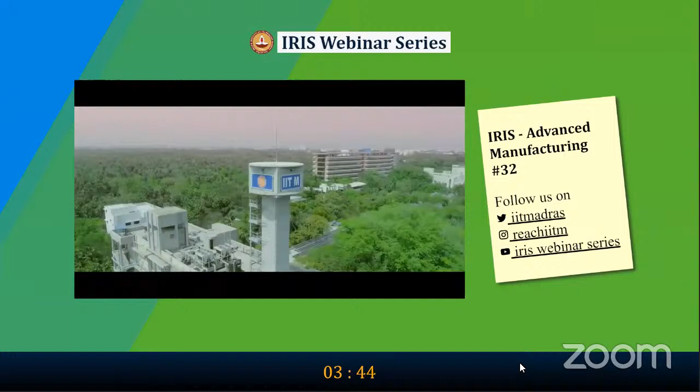As part of our commitment to the cause of fostering world-class research, IIT Madras has set up a number of research initiatives in diverse fields of contemporary relevance. Many of these initiatives will go on to become centers of excellence within the IIT Madras system. A total of 68 research initiatives belonging to 21 identified technology clusters are presently underway.

As part of these initiatives, it is proposed to host a series of webinars from each cluster to showcase the innovative research being generated to various stakeholders like researchers, industrialists, and policymakers. These webinars will give an opportunity to engage in conversation with eminent faculty from IIT Madras and other international researchers, and also to find more collaboration in those research areas.

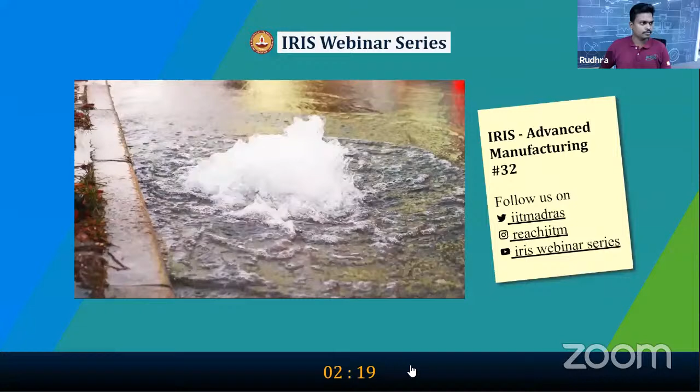From our survey, we found that most of it goes into leakage, and since the pipelines are underground, there is no way of telling where the leakages are.

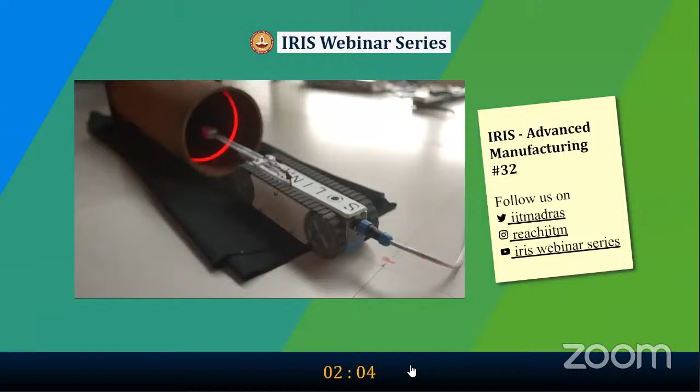Endobot is a robotic device which can travel inside underground pipelines to identify various types of defects.

Other than water pipelines, Solinas has also developed similar devices that can be used in oil and gas pipelines. It is the recent access to open source electronics that has made such robotic automations possible at an affordable price.

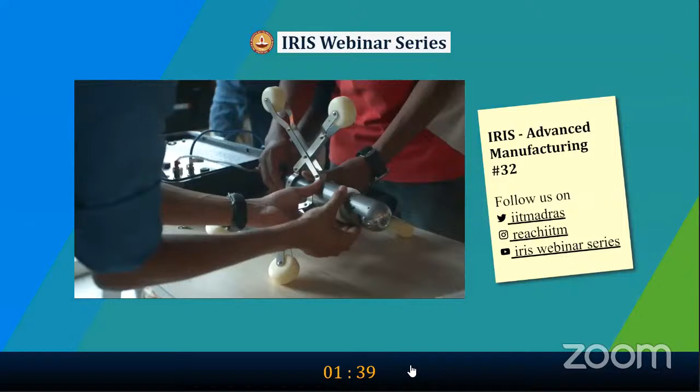A 12-feet minaret on the Darwaze-e-Roza of the Taj Mahal was blown away by high-speed winds in Agra on Wednesday.

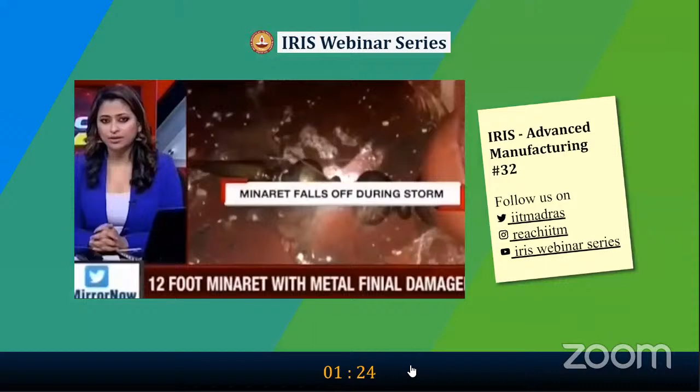Unscientific interventions are responsible for decay in a shorter period of time than their thousands of years of existence would otherwise suggest.

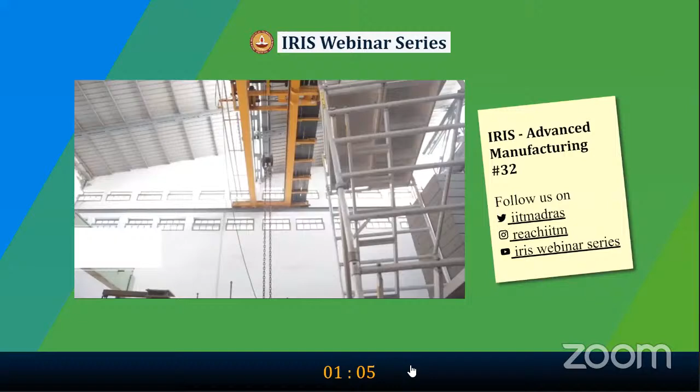Although study of materials used in heritage monuments and other structures is not new, there was little R&D in the area of structural and engineering aspects of these heritage structures until the National Center for Safety of Heritage Structures was set up inside IIT Madras in 2013.

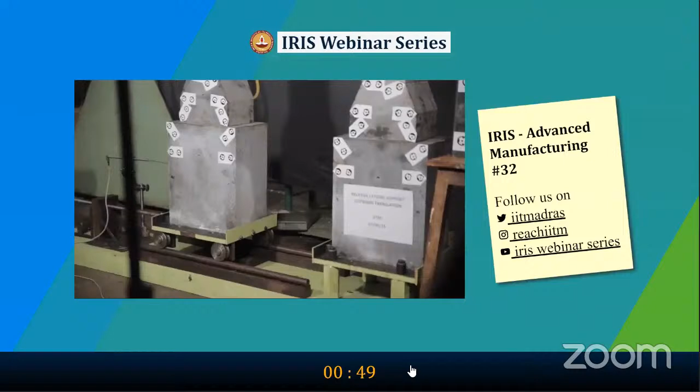We're working with a large number of historical monuments in our country, across the length and breadth of the country, and not only in India, even abroad.

Actually, we have a very good world-class gym facility.

Thanks for the lovely video, Shivram. I mean, IIT Madras, it's a big ocean. It's always good to know a lot more about IIT Madras.

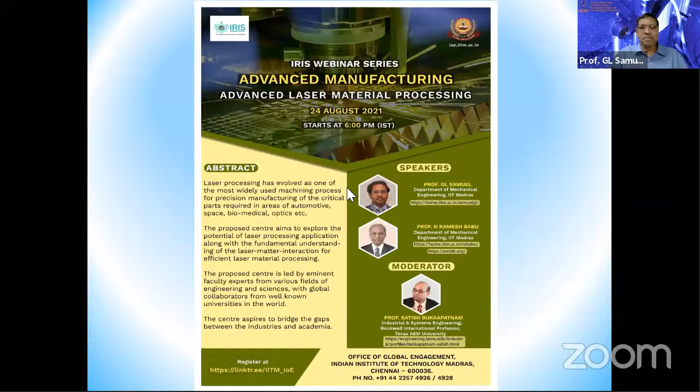Under the main heading of Advanced Manufacturing, the name of our center is Center of Excellence for Advanced Laser Material Processing. We need to thank our government and the Ministry of Human Resource Development, MHRD, for giving IIT the status of Institute of Eminence. We thank our director, deans, and all the team for helping in building up these centers of excellence. This center is a part of advanced manufacturing technology.

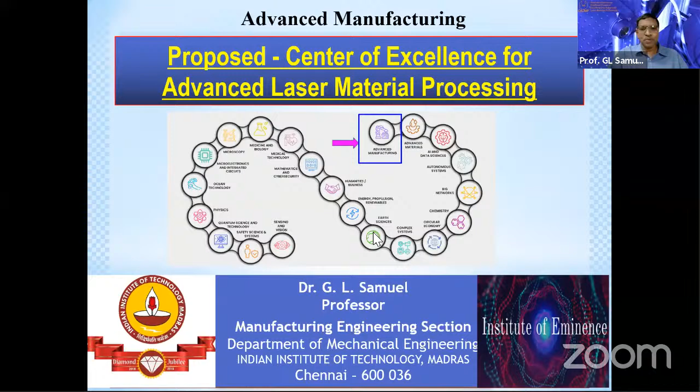Today we'll be looking at some fundamentals about lasers, and then we'll look at some of the applications of lasers and the work which we propose to do in this center. We'll also introduce you to the team who are working on this, and we have an exciting small quiz for all of you - we'd like to understand your level of knowledge about lasers. You may think we'll do the quiz after the seminar, but no, we are going to do it right at the beginning to see how you will do.

If you talk about lasers, light amplification by stimulated emission of radiation is a very interesting phenomenon. Right from my childhood, I've been fascinated by lasers, so now I got an opportunity to work on this, and I thank God for that. If you look at the background and history, this phenomenon of coherence and lasers was found in the beginning, and they made a statement saying it looks like a very interesting phenomenon but without any applications. But today, from where we stand, look at the number of applications being done with these lasers - starting from the laser pointer, which we as teachers use almost every day, to big phenomena like Star Wars, where they wanted to take very powerful lasers and focus them on anything which can be destroyed.

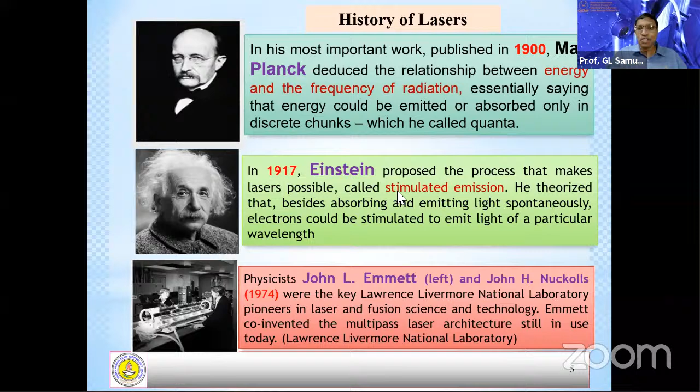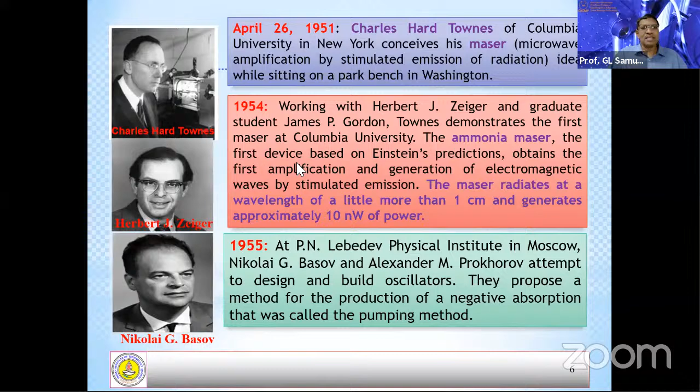Einstein talked about stimulated emission, and the inventions go on. Several people contributed to discovering lasers and bringing them to the level we have today. Charles Townes is another name associated with this, and there were several patents in the US and other countries that were developed. Finally, we arrived at the state we are talking about today.

When you look at some of the laser applications, you'll wonder how so many applications we've been able to develop.

When you look at lasers, we can divide them into different categories based on how they are produced. For me, I've divided them into three categories: continuous lasers, short pulse lasers, and ultra-short pulse lasers.

Pulse lasers are more powerful than continuous lasers. Think of an example: if you want to break a stone, you can either take a big hammer and hit it powerfully, or take a small hammer and hit it several times. In both ways, you can break the stone.

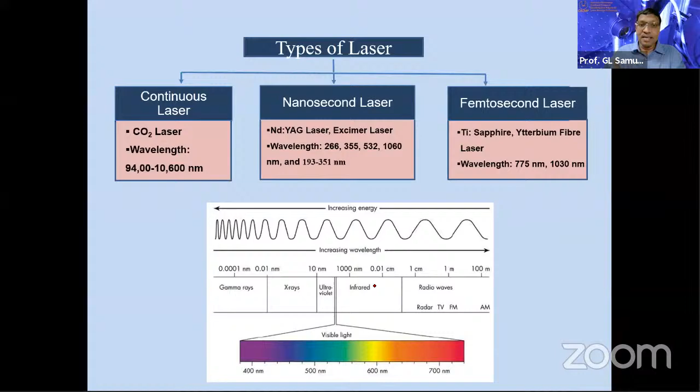Pulse lasers are very, very powerful and are available across all ranges, from ultraviolet, where you can't see, to the visible range, and even the invisible range. In the invisible range, they are very dangerous, because there were researchers who almost lost their eyesight when they fired the laser, as they couldn't even see it.

That is the reason for safety precautions. Generally, what they do is combine the invisible laser coaxially with another visible light, so that you can see light coming and will try to avoid it. That's how these lasers work.

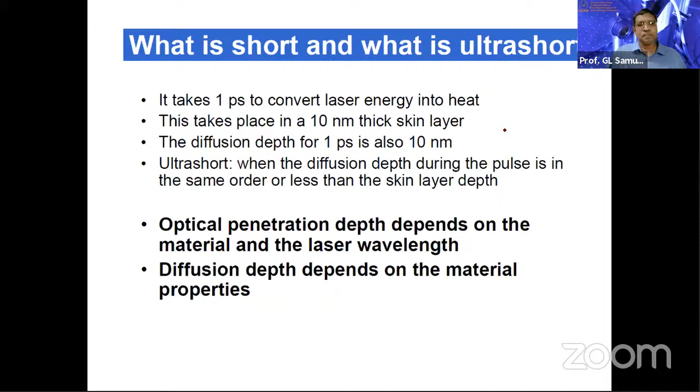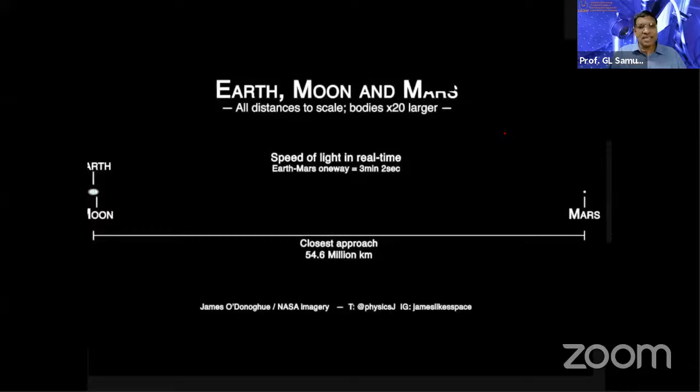When we talk about ultra-short pulse lasers, they are in the range of 10 to the power of minus 13, 10 to the power of minus 14 seconds, like picoseconds and femtoseconds. To understand how short this is, consider the distance between the sun and the earth, which light takes about 500 seconds to cross.

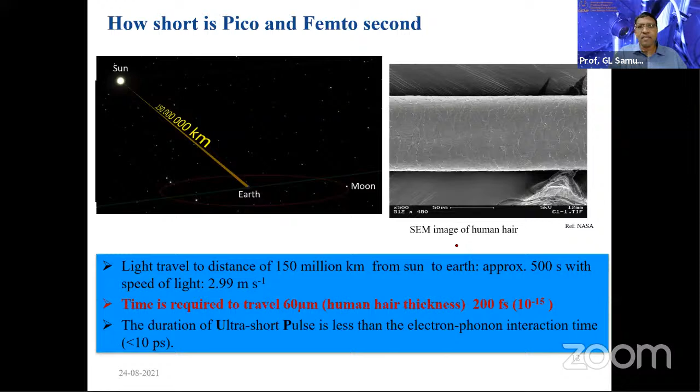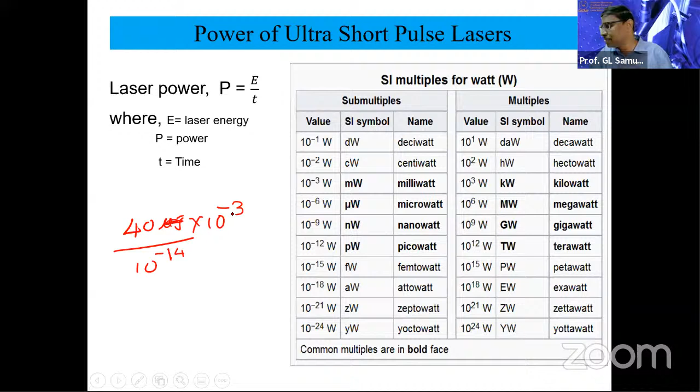When you look at the power which these lasers generate, they are very powerful because of the energy we put in one pulse. Usually we have a pulse energy of 40 microjoules, and we put it in a time period of 1 into 10 to the power of minus 14 seconds. If you take micro, that's 10 to the power of minus 6, so you cancel these zeros, and finally the resultant will be in the order of 10 to the power of plus 9, so gigawatts of energy will be obtained instantaneously by using this kind of pulsed laser.

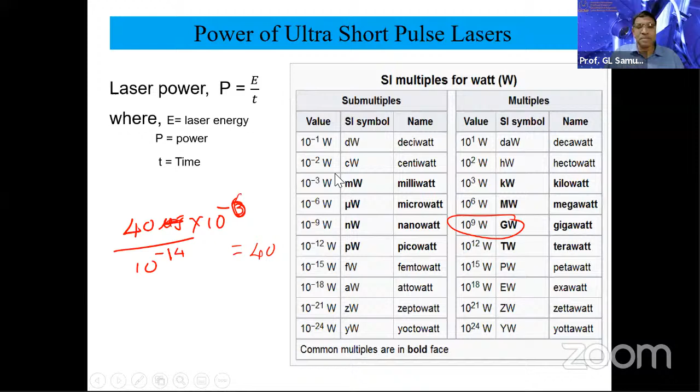And they are so powerful that when you put them on even the hardest material, they vaporize it even before the heat actually passes into the bulk of the material. So this phenomenon has been very much used in machining of various materials.

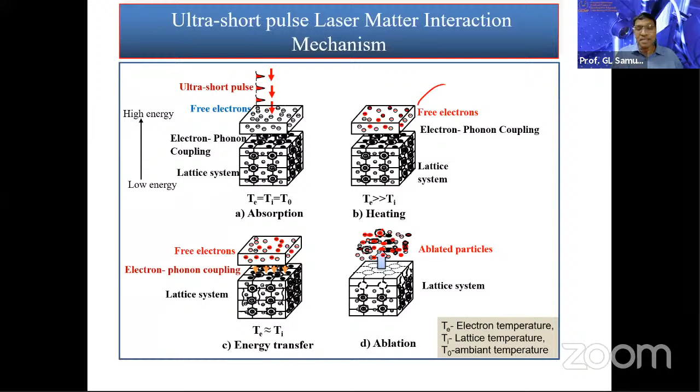If you try to understand the laser matter interaction, this is a great phenomenon that happens when you put a short pulse laser. The top layer, which has the free electrons, will absorb the energy and get heated up. The heat is so intense that before it reaches the bulk of the material, it quickly evaporates and the material is removed. That is the reason you get a clean cut, as you see here, by using ultra short pulse lasers.

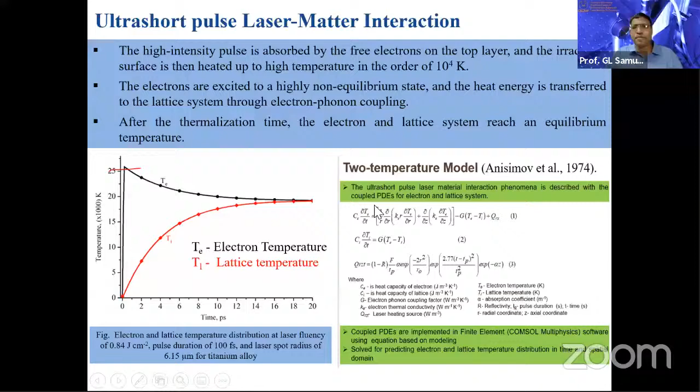When we talk about modeling this kind of ultra short pulse laser and study the laser matter interaction, something great is happening here. When we put the laser, instantaneously the temperature of the electrons shoots up to a very high extent, and then it starts cooling. But the lattice temperature, the bulk temperature, slowly increases because there isn't much time for the heat to be transmitted. So this kind of phenomenon can only be modeled using what is called a two temperature model.

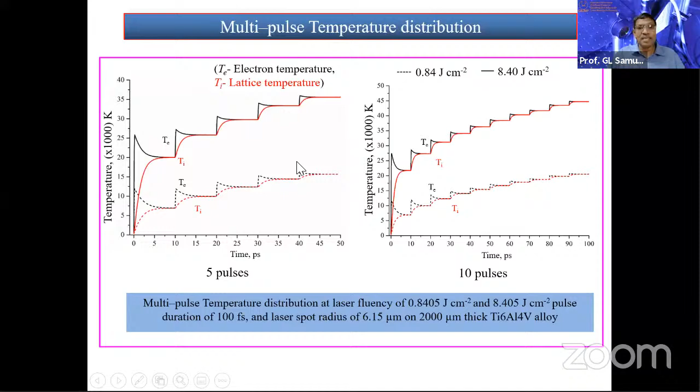When we put continuously several pulses, we can see how the lattice and the electrons react. The temperature shoots up, then tries to come down, and immediately we put another pulse. So again the temperature shoots up, and this is the way the material reacts to the pulses, and the material is being evaporated and removed.

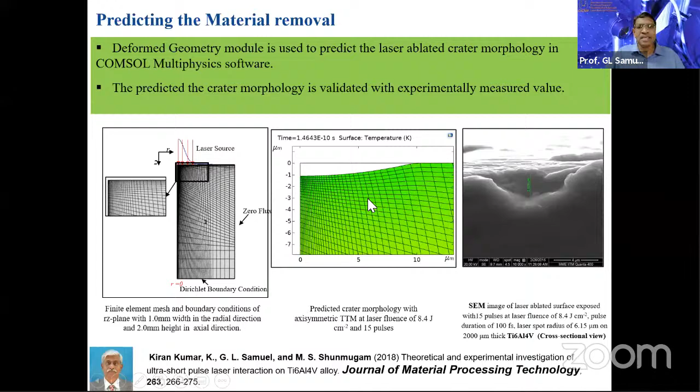My student, along with Professor Shunmugam, who is an emeritus professor, joined this webinar. We have been working on modeling this kind of laser material interaction to see how much material is removed when you put a pulse on the material. We took titanium alloy, Ti-64, removed the material, made a cross section, measured how much volume had been removed, and then modeled it and compared. This work is still being continued.

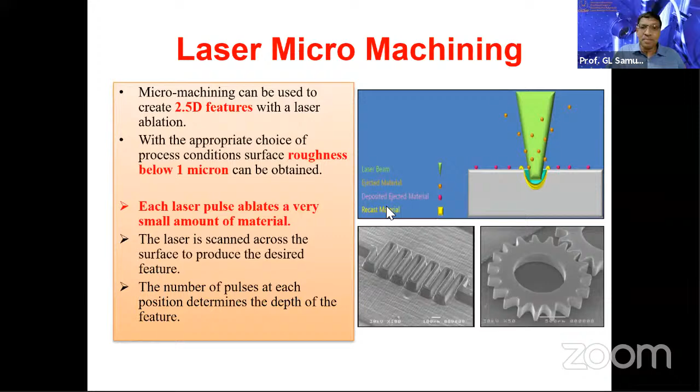Similarly, not only drilling holes using this, we can do even milling of channels and other profiles using the ultra short pulse lasers.

When you look at drilling, we can carry out several types. Percussion drilling means we put several pulses at the same place, so then the material is removed. But if you want to remove a bigger area, we can pass the laser in a particular path and remove the material. If the material thickness is more, we can go in a cyclic way and remove the material.

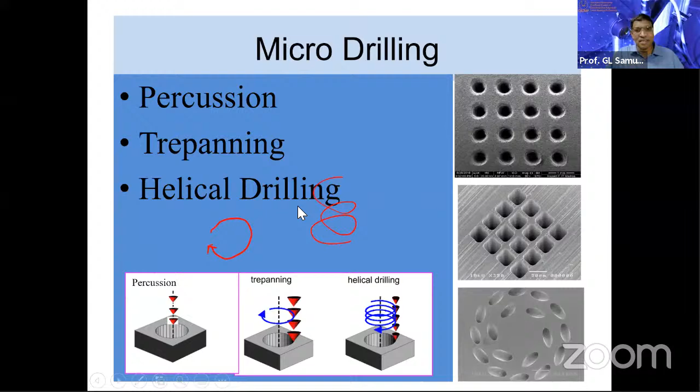So along with material removal, we can combine other technologies of moving the lasers at a very precise level, and we can achieve different profile shapes with high precision.

So some of the applications of it is, we have been working on this research project making micro holes for the coolant holes in the blades of jet engines. The jet engine blades need to be cooled, otherwise at the working temperature they will get melted. But by using the coolant holes, a high pressurized fluid will be circulated and the blades are kept cool.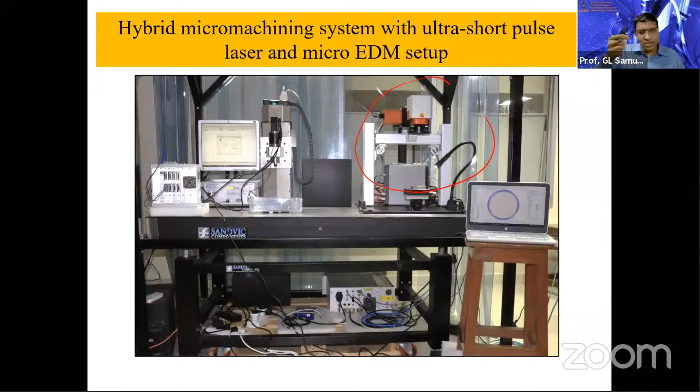So in this center, at IIT Madras, we have developed a system with an ultra short pulse laser, which you can see here. We have been planning to make it a hybrid machining process where with EDM, electrical discharge machining, we make the holes and then finish them with the ultra short pulse lasers. Ultra short pulse machining is something like the scalpel of a doctor, where if you want to cut an eye, he can do it very precisely. That's how the ultra short pulsed lasers work, and we can finish the holes to get highly accurate and precise results.

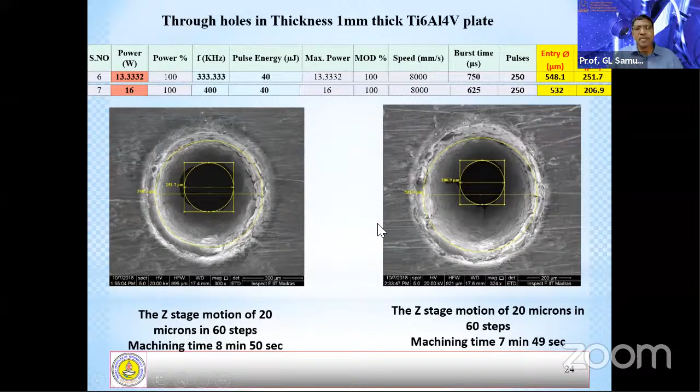So these are some of the experiments we have conducted, and we have now published some of the results. Another interesting work we have been carrying out, and will continue in the future, is the micro machining of micro channels in silicon.

Generally when we were in school and college, we were told that lasers cannot cut highly reflective materials and highly conductive materials like aluminum, because the heat is absorbed. That's true with continuous lasers, but with short pulse lasers, we can even cut highly reflective and conducting materials. This is what we have seen here in the micro machining of laser silicon.

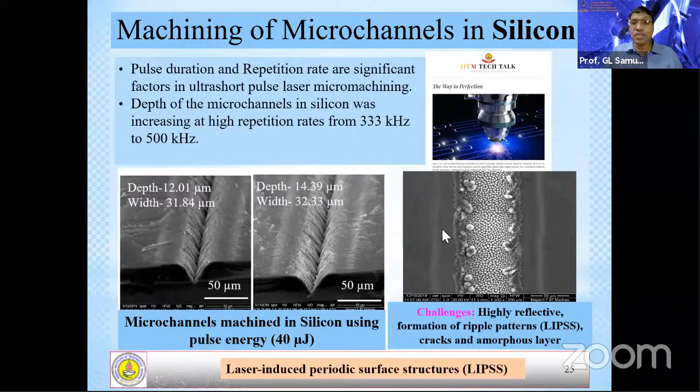Another interesting phenomenon we have observed here is at the bottom of the channel, we can see a very systematic pattern. This is called laser-induced periodic surface structures.

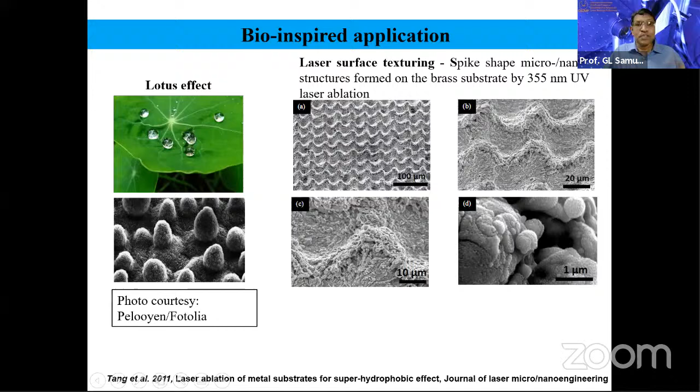These are of great interest these days to produce different types of structured surfaces, because whenever we want special properties for materials, we see what is called hydrophobic and hydrophilic surfaces. In some places, like the lotus leaf, we don't want the surface to be wet, so for that we can make texturing to achieve it.

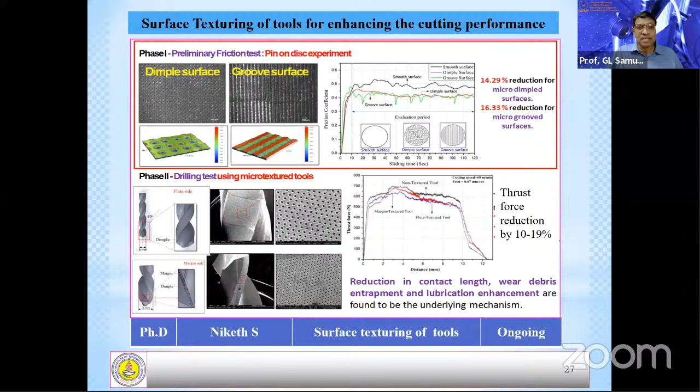So we have been working in this area. We have made these kinds of textures on the tools, and we found that the friction was reduced and the efficiency of machining increased to a great extent.

We have also been working on the problem of texturing various materials to achieve hydrophobic and hydrophilic surfaces, in collaboration with University of Technology Sydney, Professor Dongbin Wei.

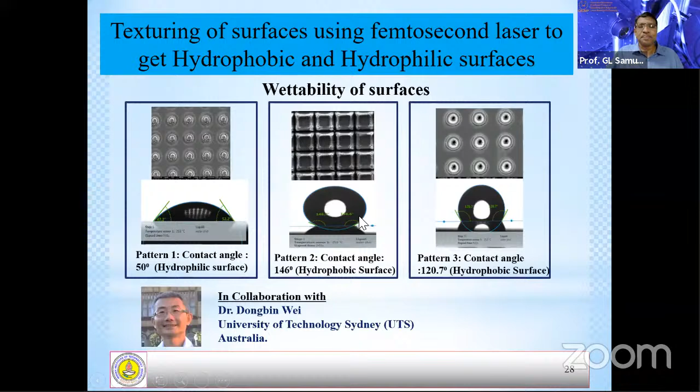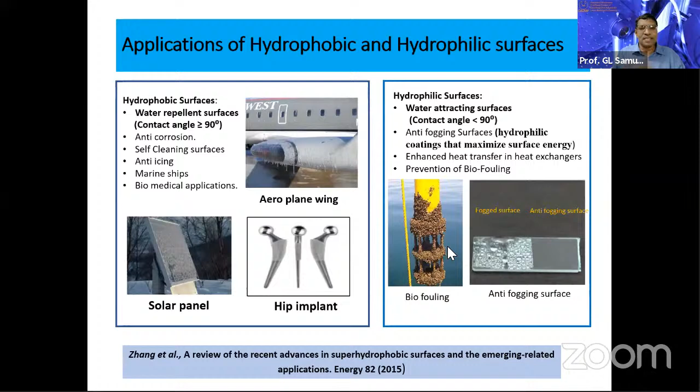As we move on, we also see applications of this kind of texturing on solar panels and aeroplane wings, where we don't want ice to form during the winter, and also in biofouling, to make surfaces anti-biofouling so that fungus and algae will not stick to the surface. All these things we can do by making the texturing.

Not only that, we have been working with Deakin University with Professor Lingxue Kong, where we have been trying to put textures at the bottom of microfluidic devices, so we'll be able to achieve separation of the flow or mixing of the flow in a much more efficient way by putting the textures at the bottom of the microfluidic devices.

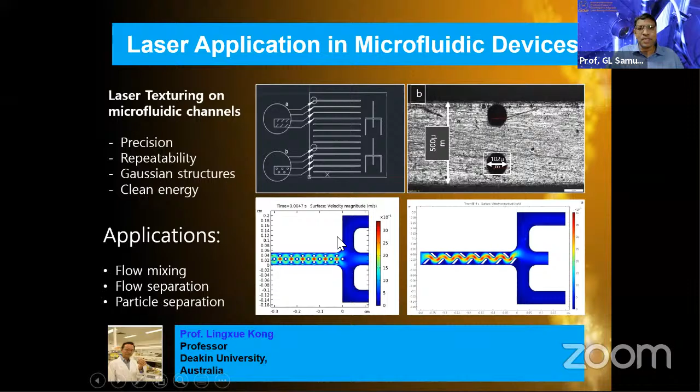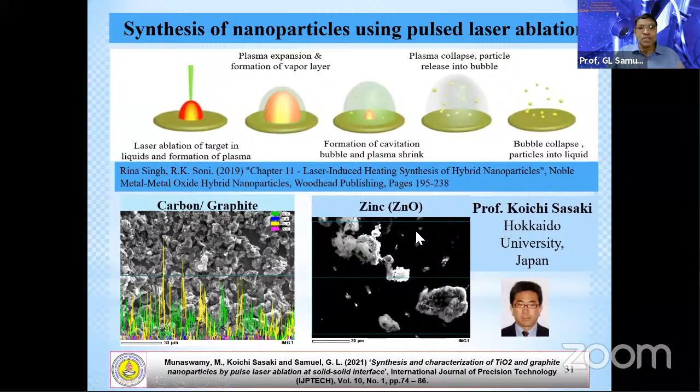We are also working in collaboration with Professor Sasaki from Hokkaido University in Japan to produce nanoparticles. When we apply the laser, it will be ablated and a plume will be formed, and when it bursts, that energy is used to burst the material and nanoparticles are formed. So we have been utilizing this process to produce nanoparticles.

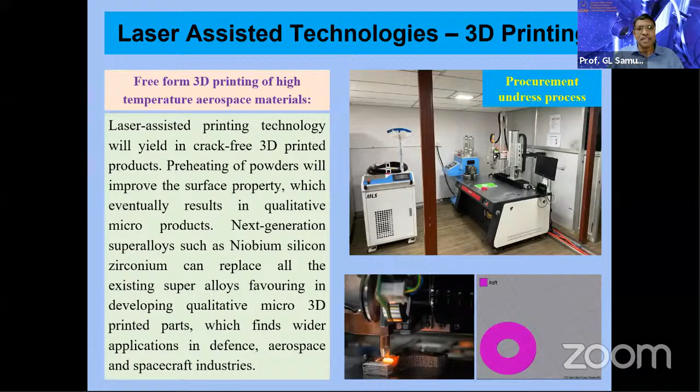Even in the future, we have been procuring, it's under process, a 2 kilowatt laser for laser welding and also for 3D printing of metals. These days, 3D printing of metals has been achieving great importance because it has a lot of practical applications. Another area we are planning to work in is laser shock peening, by using which we can enhance the properties, particularly the fatigue strength, of the materials.

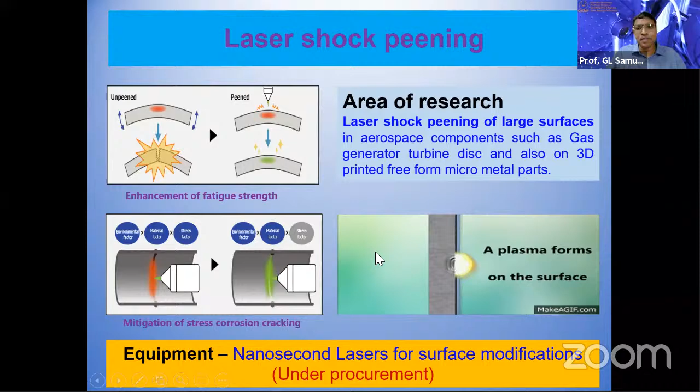And thus, when you use some of the gears and other parts which are subjected to fatigue, when you subject them to shock peening, they'll be relieved of the internal stresses and they work much better.

Since we don't have much time, I'll take just a few more minutes to talk about the measurement and characterization of these micro features, because they're very important. Not only producing these micro features, but characterizing them is very important. Lord Kelvin said, unless you measure, you cannot make it. Somebody may make a nano hole, but if you can't measure and prove it, you can't characterize it.

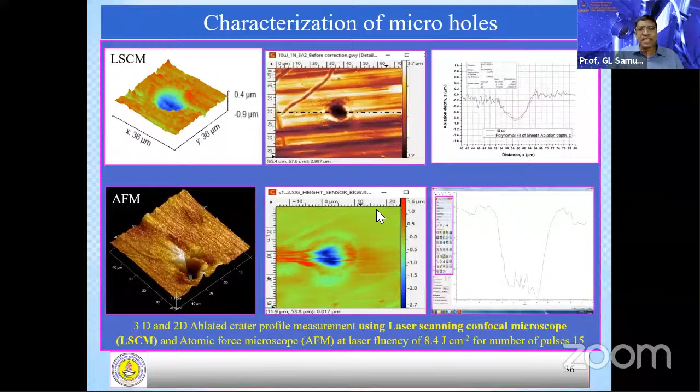So we have actually characterized our micro features using several instruments like optical profilers, using white light interferometry. We also used laser scanning confocal microscopy to find out the profiles and what material has been removed. We also used the atomic force microscope to see at the micro or nano level how material has been removed. We tried several methods and finally could arrive almost very close to an estimation of the amount of material removed.

But still we had a challenge when we wanted to characterize cylindrical holes of a few millimeters depth. We couldn't find any instrument because the probes cannot go into those holes, and when the walls are vertical, the light won't get reflected so you can't get back the images.

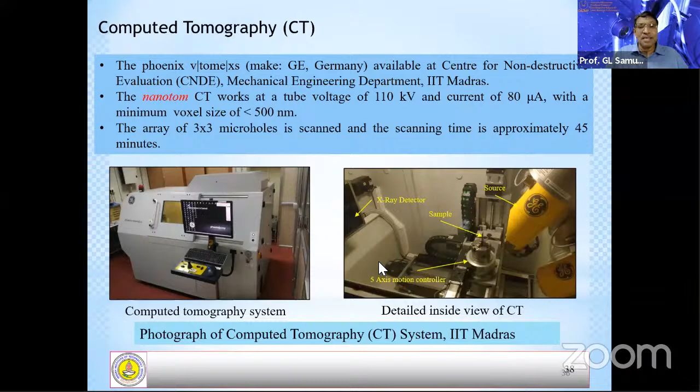We tried all the instruments and couldn't succeed, but finally we were able to do it using computed tomography, like in medical CT scans. Similarly we can do that for metals. We have a nanotom CT, so even if the holes are micro cylindrical holes, we can take the cross section, several sections of it, and then geometrically with the software combine them and reconstruct the internal cylindrical holes which you can't see from outside. Then we can characterize, finding the circularity error or the cylindricity error.

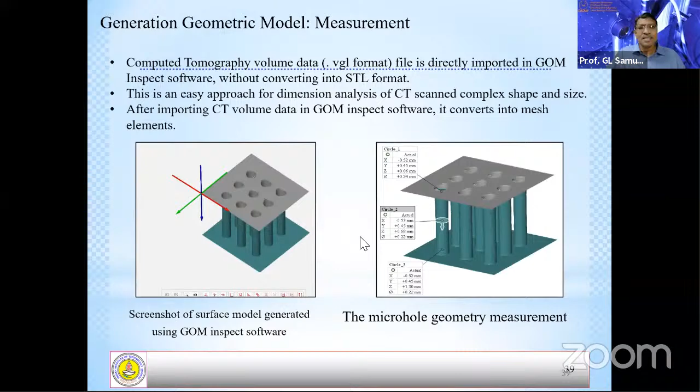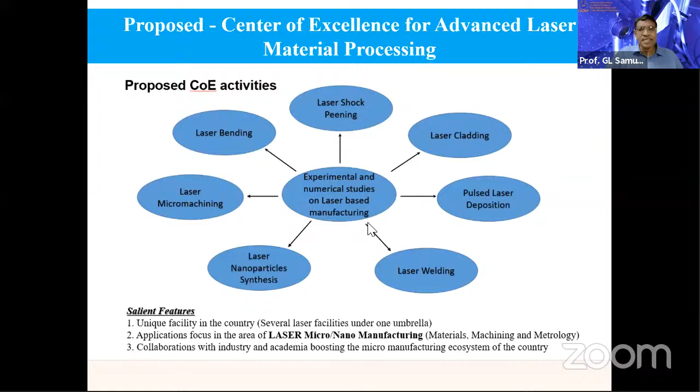These are some of the areas on which we are planning to work and have been working. The center is something unique, where we are trying to put all the facilities like continuous lasers, nanosecond lasers, and femtosecond lasers, then characterization and measurement, metrology, and even modeling, under one umbrella. This is a mammoth task, it can't be done by a single person, so we have a big team helping us, eminent in their respective areas.

Professor Ramesh Babu sir is going to talk about not only the research, but how to take it to the next level of making it into a product, after my talk. Professor Nilesh Vasa, currently the Dean of Students here, will talk about laser deposition and other phenomena in the next series. Professor Fani Kumar from Metallurgy and Materials is an expert in laser welding. Professor Amitav Ghosh will talk about mechanical micro brazing of the tools and carry out work on that. Professor Sivaramakrishnan from Physics has been helping us in modeling and understanding laser material interactions at the nano level.

We also have strong collaborators from national and international levels who have been working with us. Professor Satish Bukkapatnam is here with us, and we have Professor Rodovan, and Professor Narendra Dahotre from University of North Texas, Professor Rajurkar, Professor Sasaki from Japan, Dongbin Wee from UTS, Professor Ling Sukong from Deakin University in Australia, and Dr. Ravi Bate from ARCI Hyderabad has also joined. We have been collaborating, and we have a strong workforce of research scholars who have been working day and night to make this possible.

As Professor Satish mentioned already, I do not want to dwell on the basics of materials processing with lasers and the applications of lasers. I think by now you all know about it. But I wanted to take you through a journey which I have made over the last three and a half decades on laser materials processing.

I started my journey at IISc Bangalore when my professor asked me to develop a setup for making micron holes with an Nd-glass laser, then an Nd:YAG laser. I had to make a small precision translation stage. Even those days, he was planning to engrave fine grooves for photolithography.

I did not know why he asked me to first make the laser work in the TEM00 mode. I started reading two books which really motivated me: Principles of Optics by Born and Wolf, and Solid-State Laser Engineering by Koechner. These books showed me where the science and engineering comes into picture.

Then I was in ISRO for a couple of years, but I wanted to go out of the country to do my PhD, and my parents did not allow me. So I resigned from ISRO.

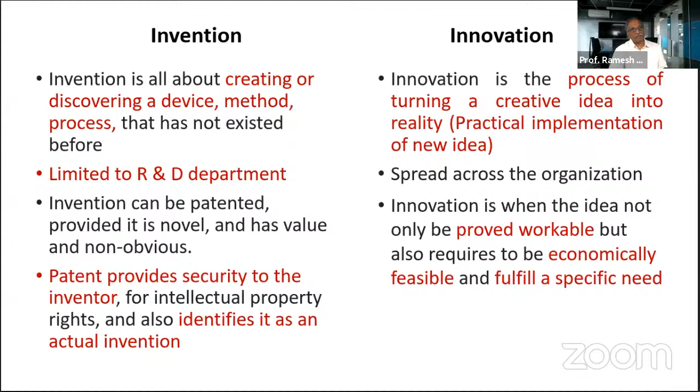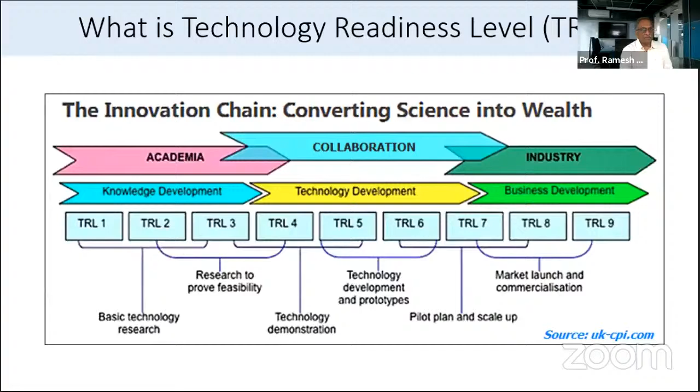I will quickly take you through my presentation. When my guide said that we'll go through the dressing of grinding wheels, the first thing I did was look into diamond dressing and laser dressing. In those days, people used to use only single point or multi-point diamond dressers. For those of you who don't know much about it, don't worry — I'll show some pictures from which you can make something out.

While dressing the grinding wheel, you need to stop or interrupt production, and this causes loss of productivity. Another point is that wheel material is lost heavily, more so in loaded grinding wheels. You end up wasting a lot of wheel material, which gets unnecessarily consumed — so when it becomes smaller and smaller, you throw it away. This is where sharpening wheels with a single point diamond dresser becomes highly inflexible.

Another important point is that when dressing, you rotate the wheel and move the dresser across its width, which produces helical grooves. I'm talking about this to bring out an analogy to an existing process — you need to study existing processes and see what improvements can be made through this invention. So the problem is the grits wear out and the wheel becomes blunt, and with some soft materials, chips go into the pores, loading and clogging the entire wheel.

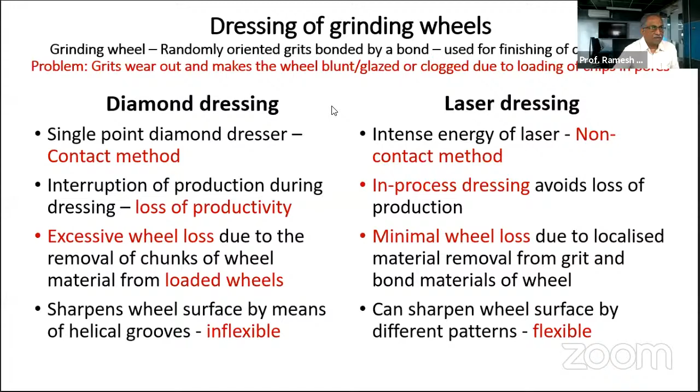So of course, finally you can sharpen the wheel by means of helical grooves, by means of any pattern that you can produce by scanning the laser on the wheel surface. These are the things which I really did in my PhD. When my thesis went to Milton Shaw, he praised it, and in fact some part of my investigations were included in his book, which was published after my thesis was defended. So why I'm saying all this is, a lot one can do if you do this research in a very systematic way. And I'm going to show you all these TRL levels.

Up to 6 only I could do, because the industry is still hesitating to go in for this since they need to find some commercial value and economic viability. I don't need to spend much time on each of them since I have given enough introduction on what I planned to do and how I did it.

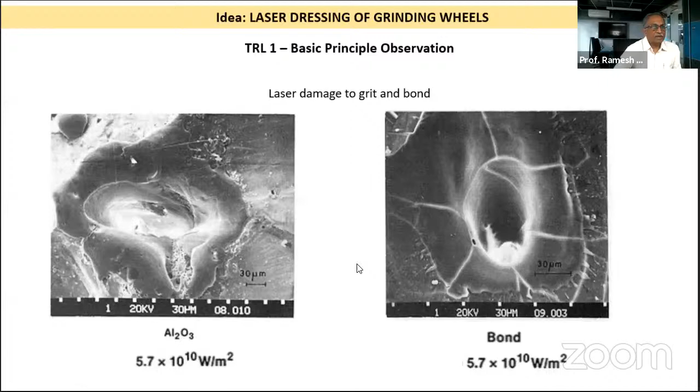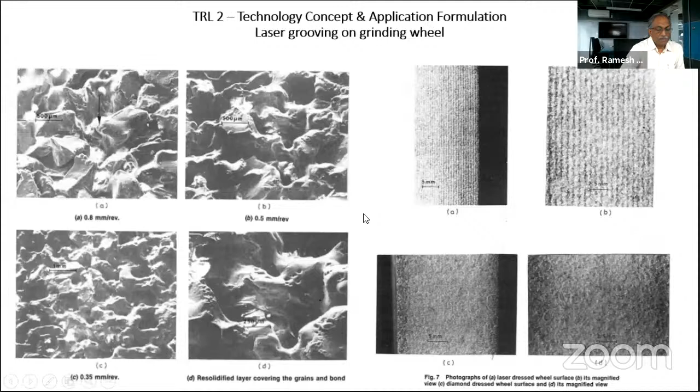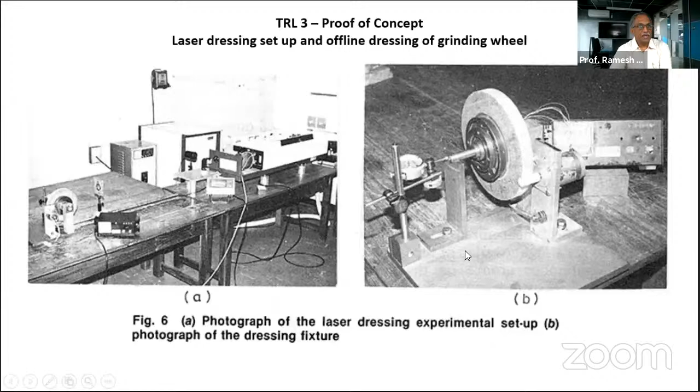Then we made a setup, and this experimental setup is used in the physics department of our IIT. And then we also made a fixture. You can see that the entire thing we just made, and using the fixture we have dressed it.

The next step is you have to prove it in actual practice. So I can't just say that this works. The proof of concept was attempted by taking out the wheel, mounting it on the fixture, then dressing it. And we had to have some ingenious ways of putting it back without any disturbance, like the wheel balancing, both statically and dynamically. So we used some innovative ways of taking out the wheel with the mandrel and then putting it on the fixture.

As you can see, we made a comparison with both the laser as well as the diamond dressed wheels. And this comparison essentially gave us the confidence that it is possible to do it. Why confidence? Because when you put the wheel along with its mandrel on the spindle of a machine, if it goes out of roundness and gives some eccentricity, the entire effort will go waste. It has happened once or twice. So what I'm saying is you need to have some ingenuity. That is called engineering.

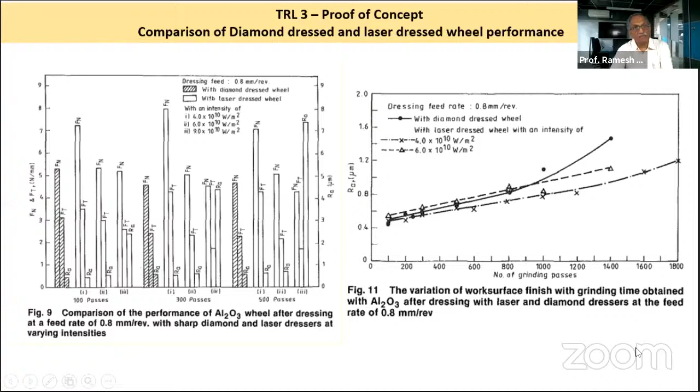So you have to put all of these thoughts into practice. We also found finish improvements, and though initially there were some hiccups, we said okay, we can solve these problems. Engineering is extremely important to really prove the concept, otherwise you think these concepts will not work. That's where a lot of patience and ingenuity is required.

Then we went for performance analysis of the laser dressed wheel versus the diamond dressed wheel at different conditions. It's not enough to choose one condition and publish a paper, you need to mimic different diamond dressing conditions in the laser dressing, and finally found that laser dressing gives better performance and the wheel life is also much, much longer. I think these are all published and available in the literature, so I just wanted to give you this.

So what happened in these 5 years of research is we proved the principle of laser dressing by means of fundamental studies, and we also proved its validity by conducting these experiments offline.

We also showed some other benefits of laser dressing by grinding austenitic stainless steel, which is a softer material, and immediately it gets clogged. When the wheel gets clogged, we just used the laser, defocusing it, to melt and remove this debris. That's another application.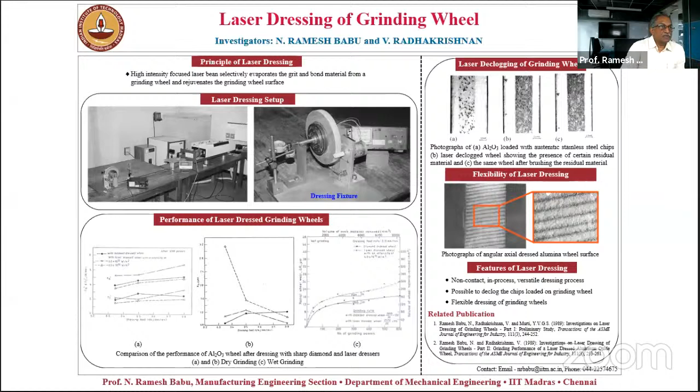Then for flexibility, instead of having helical grooves, we made axial grooves, at an angle axially. So all these things have helped. You can just imagine how you can develop this process if you have some sort of a real idea that can be taken forward.

In 2000, I think almost 2 decades I tried this, but I left it. Meanwhile, CMTI was thinking of some collaboration with IIT. Professor Ranga Komanduri and the director said let's have some collaboration, they were looking for ideas, and I said why don't we try this laser dressing and make it into an online dressing?

The laser I used earlier was a long pulse laser, about 450 microseconds. But here we used a picosecond fiber laser and made an attachment as part of our collaborative effort, made it as an attachment on the machine itself. Laboratory testing of this entire integrated system is what gives you the confidence that you can move from science to engineering, from ideation to technology.

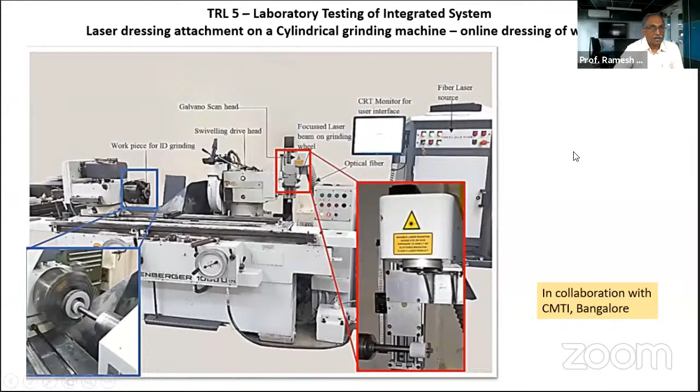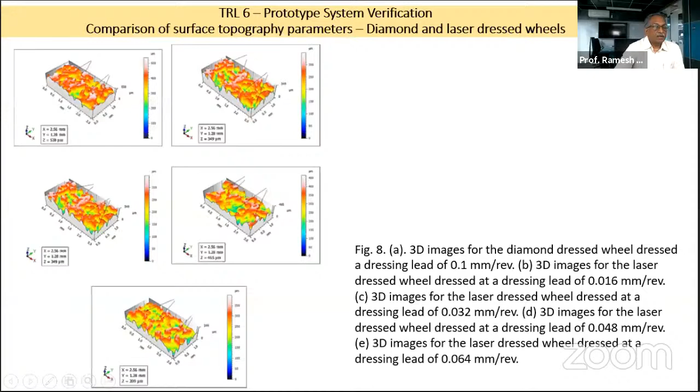So my students have used this and published results. In fact, with Saint-Gobain we have had several interactions and discussions, and these are various results we generated by dressing small wheels used in internal grinding applications. So if you have an original idea, you can generate lots of other results and technologies.

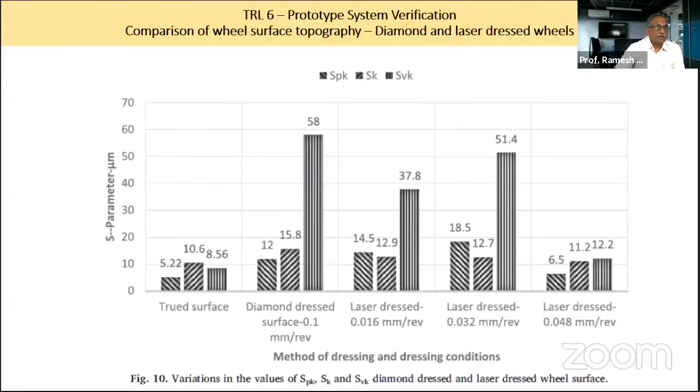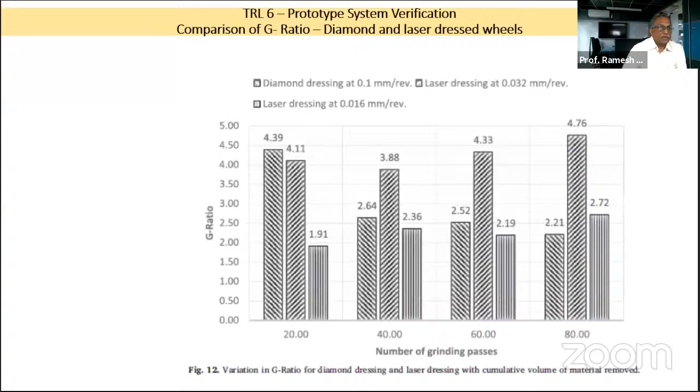In this case, I'm showing you that we used various surface topography parameters, unlike the ones we used in 1985 to 1990, like S parameters, using imaging systems. We also proved the effectiveness and efficacy of the laser dressed wheels with online attachment, and these are all published. As you can see, the roughness values and everything, we need to evaluate it like a G ratio.

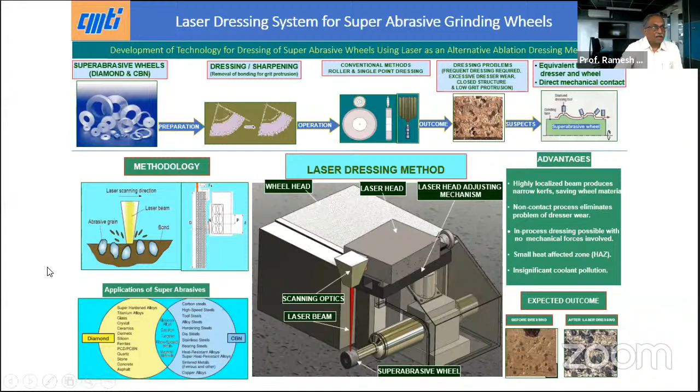Whatever we've done has resulted in a setup which can be attached to any grinding machine tool, and you can also use this for super abrasive grinding wheels. Now it opens up several other avenues when we talk about high speed grinding and creep feed grinding, etc. This is where I feel the efforts have gone up to technology readiness level 6 only.

After I completed my PhD, I started working on CNC machines and robots and other advanced manufacturing technologies. We had the opportunity to interact with industry and develop a precision grinding machine, and that gave many industries confidence that we can build a center of excellence on machine tools and production technology as translational R&D, commercializing these technologies.

I think this is what our Professor Satish was also mentioning here: it's 20% from the industry, they have to give the money upfront, and only then will the Government of India give the money.

And in fact, all the technologies which we initially thought of, 11 technologies, we have almost completed. And now we are thinking of several other technologies. We are not only doing the basic plus lab prototype at IIT with so many students, we wanted to take it to the commercial level. Our focus is mostly on the machine tool and manufacturing sector.

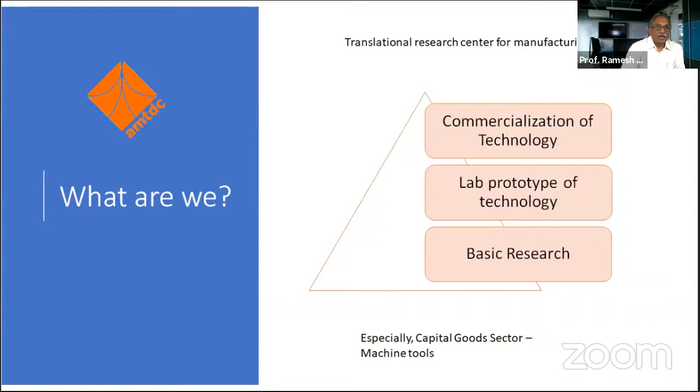We are actually doing several other things at our center over the last few years. Not only the machine tool building or automation, but we built several things, we patented them, and we are transferring these technologies also. One of the technologies which is denied to India is developed, and we took even international patents on transferring the technologies, which is basically guideways or slides and spindles.

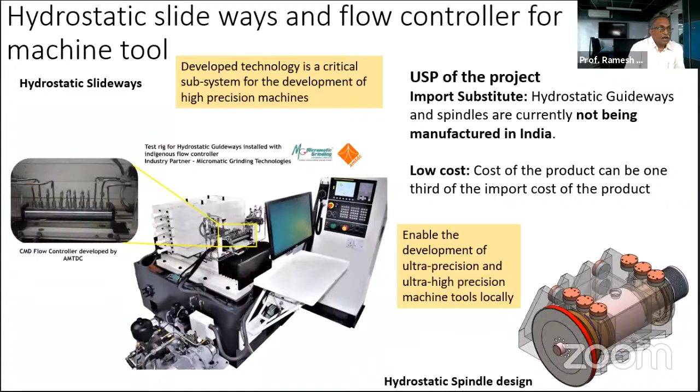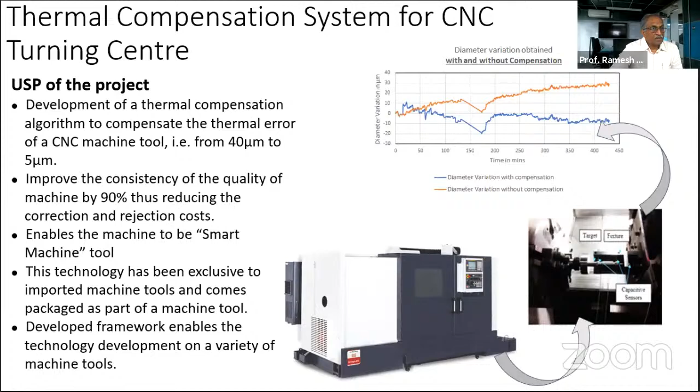We also converted a normal CNC lathe into a very precise lathe, wherein the precision levels have moved from 40 microns to 5 microns. Earlier it was giving about 40 to 50 microns error, but now we have come down to 5 microns with very few sensors, only 2 or 3 sensors. The entire machine can be converted with about 5 lakhs or less. This has given us the confidence of how to use the sensors, data, and various actuators and compensate for these errors also.

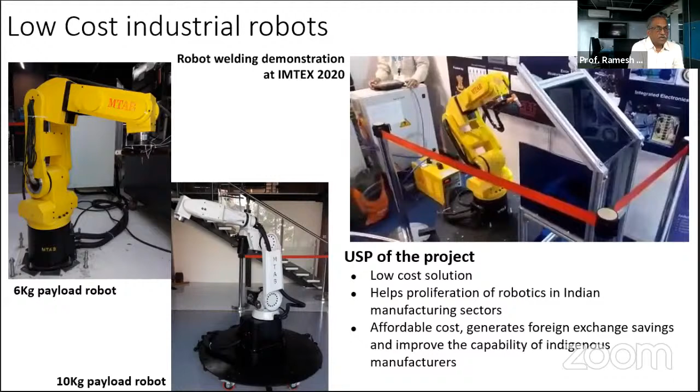The other project is basically robots. We started with 6 kg and 10 kg, which are completed now. Yesterday only we completed 25 kg. Now we are trying to put them as a unit which can be used by many industries. Once they start using it, they can also give feedback on both precision as well as reliability of these machines, which will give us another landscape for all of us. So this is another one.

In fact, Professor Satish, myself, and Dr. Subbu, we have been discussing how to build a framework for process intelligence which can be automated. Here we use both the data as well as the physics behind the process. We have made only an alpha version, and we are discussing with many auto industries to bring this technology into the limelight in the course of time.

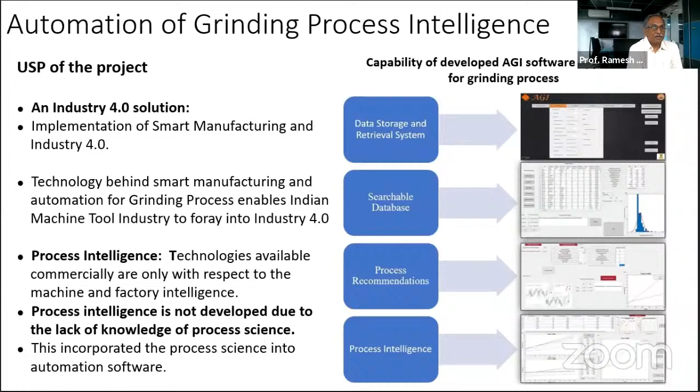So I think these are all the various things we could do. This happens only when you start thinking about the engineering and beyond engineering. Otherwise, we will keep staying only at the same spot without going further and without benefiting the society at large in course of time. Though I said all these things can be done, it is really tough. You need to put an enormous amount of effort, and continuously pursue your passion without any breaks. We are also looking for many young and experienced people to see that this movement should go on to build the wealth, and to build innovation ecosystem, etc.